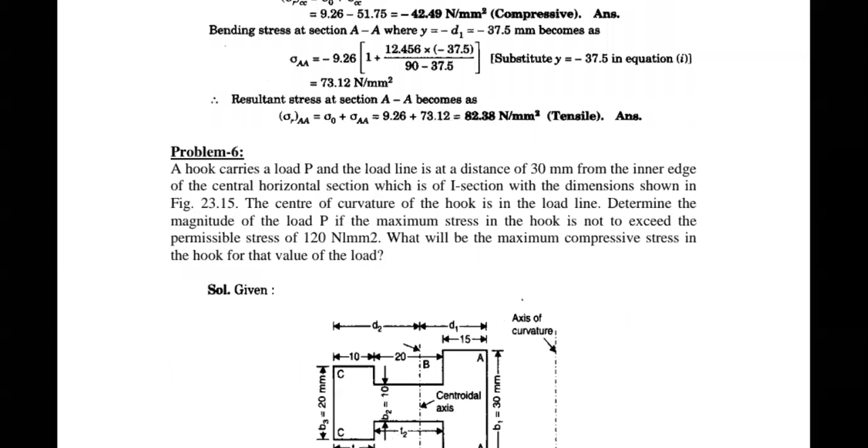In the last class, we tried to solve stand cross section problems regarding crane hook or clamp devices, whatever it is. So in this class, another important section. We'll try to solve the approach, how you're supposed to approach this particular problem.

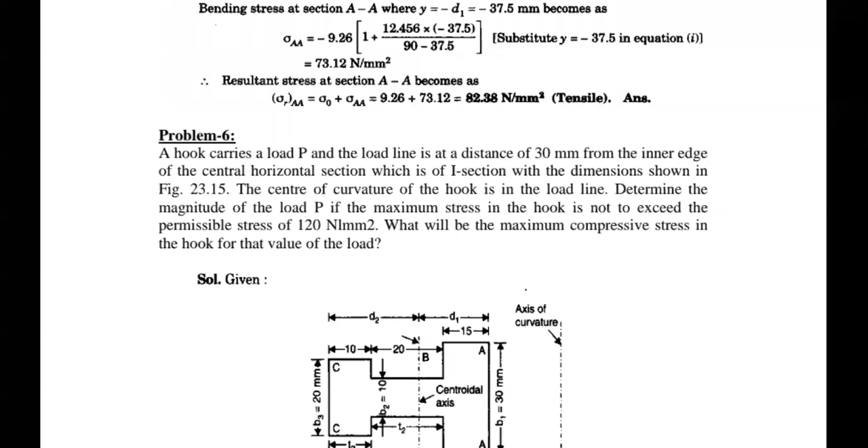It is a very easy chapter and easy problem. Try to understand the figure and solve your problem step by step. Whatever questions I ask, please respond according to that particular problem and step. Please observe the following figure first.

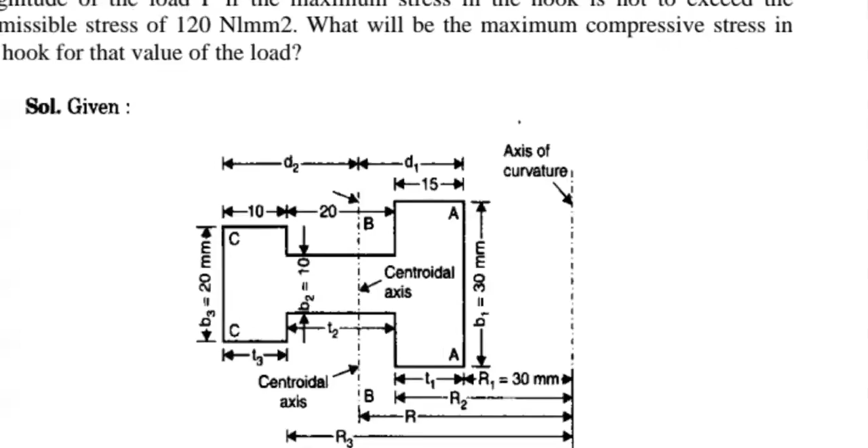I hope everyone is observing this particular figure. Please draw this figure and try to observe it. This R1, R2, R3 are normally not mentioned directly; you yourself have to allocate or identify these particular dimensions R1, R2, R3, R4. If it is mentioned in the problem, it is very useful.

Without any difficulty, you can directly apply your principles or formulas, and you will get the answer. Please observe this I-section for 1 minute and try to identify the dimensions also: axis of curvature, centroidal axis, and the distance of R1, R2, R3, and T1, T2, T3. Please observe those standard dimensions available in your figure.

Later on, we will discuss how you're supposed to solve the problem. I hope this chapter is very, very easy after completion of this particular component. So it is very easy for you.

From next class onwards, we'll move on to the next one. Please practice only this stand section, that is sufficient. The problems we'll discuss in crane hook, where the same model will be available but orientation will be different. Only orientation will change; we already discussed two crane hook problems. So practice more problems available in your strength of materials textbook.

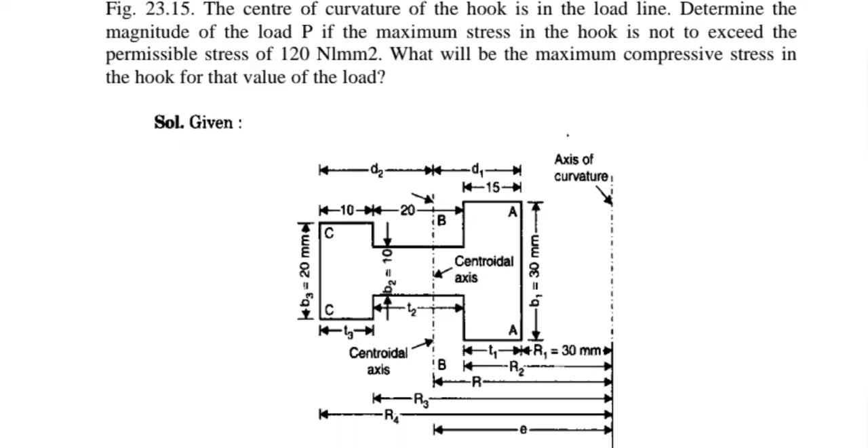Right now, please try to write down and read the problem. A hook carries a load of P, and the load line is at a distance of 30 mm from the inner edge of the central horizontal section, which is of I section.

So already mentioned that it is a cross section of I section, with the dimensions shown in figure. The center of curvature of the hook is in the load line. Determine the magnitude of the load P.

Determine the magnitude of the load P if the maximum stress in the hook is not to exceed the permissible stress of 120 Newton per mm square. What will be the maximum compressive stress in the hook for that value of the load?

So I already told you that whatever the type of problem it is, please observe that. This is the easiest method, I keep on saying that. You first observe what type of a problem it is.

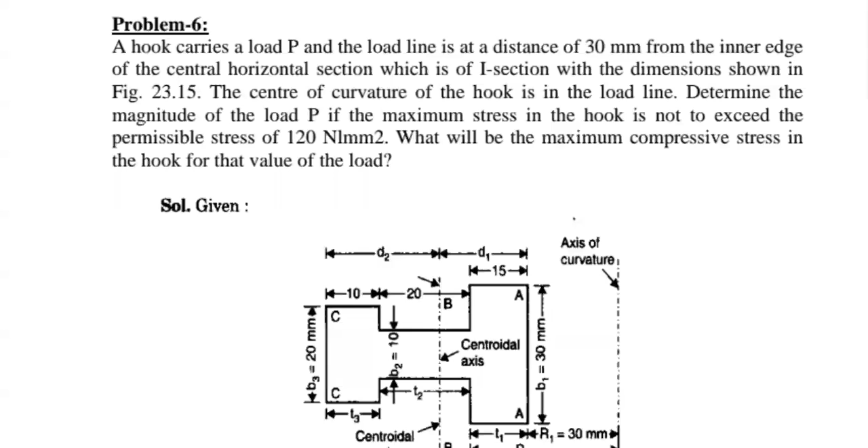In this case, please observe that for this particular problem, you are having an I section. Normally, if it is a triangle section, rectangle section, circular section, we are having standard formulas - pi by 4 d square if it is circular, area equal to b into d if it is rectangle section. But if at all it is an I section or T section, are you supposed to calculate the formula of A?

So you please go back to your calculation of centroid. In centroid, while you are calculating the area, simply you have to divide into number of blocks - it may be I section or T section. At point B and C, you're having divisions. Likewise, you have to split into 3 parts.

Same procedure - I hope you already know how do you calculate the area, total area. Total area equal to B1 into T1 plus B2 into T2 plus B3 into T3, you can say that.

So total area will calculate area values, because you're having 3 blocks, 3 rectangle blocks. So simply you have to split into 3 parts and calculate the area of each and every block and try to add. Almost summation of all the 3 areas, you will get the final area of your cross section.

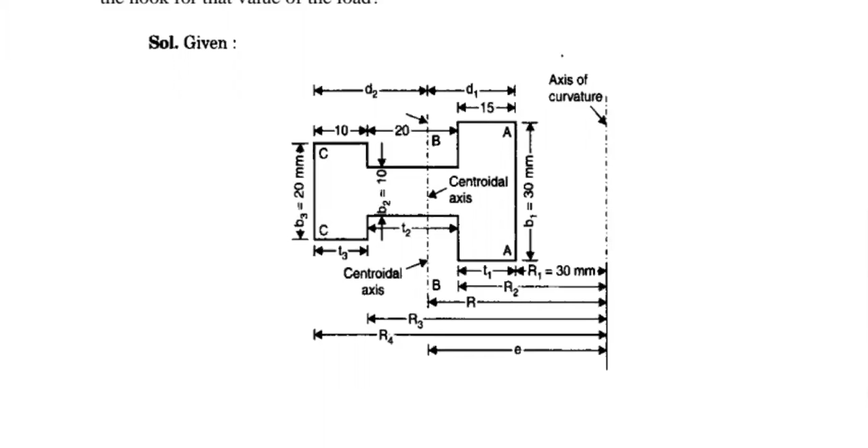Now please move on to this another slide. See, this is the calculation. So before that, please calculate. My sincere request is first calculate the area value and please verify your area value with this answer. So before we proceed further, you please calculate first the area, then H square value, then we will move on to the further steps.

So we follow our instructions so that it is very easy for you. First calculate area, total area of cross section. Here cross section is I. Calculate area and try to verify your area value with this answer. I will give 2 to 3 minutes, it is sufficient for calculating the area value. Please don't look at the answer. Without looking at the answer, please respond whether area value equal to 850 mm square is correct.

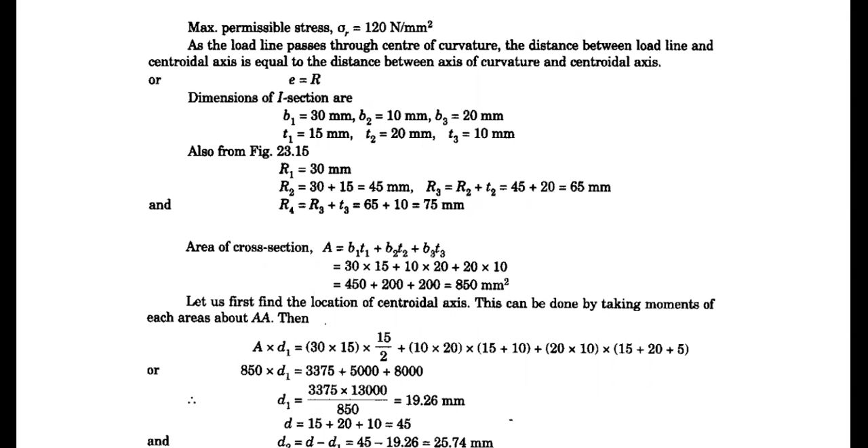You please verify whether his answer is correct or wrong, without seeing, according to that particular figure. So figure means, simply it is better to shift my slide so that it is easy for you.

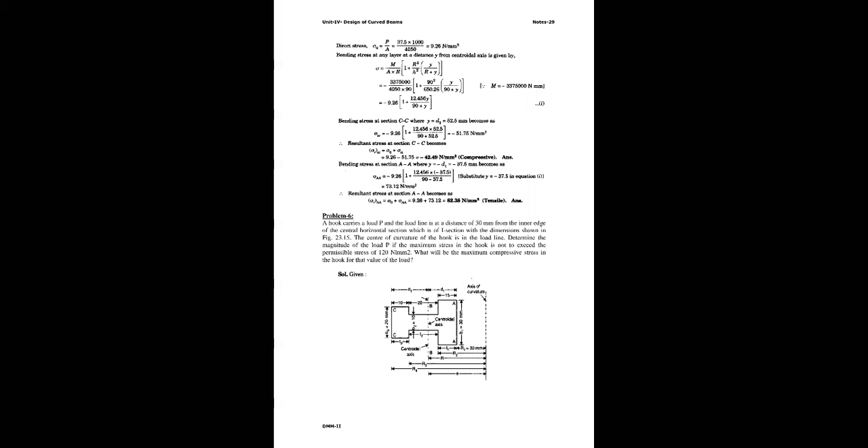Now calculate area. So it is better to shift my slide so that you calculate your area values and please check with your answer area. Because why I'm insisting on the calculation of area is this is a different cross section compared to your other sections. So if you are thorough with your I section, then it is easy for T section also, same procedure, you're having the same procedure for T section.

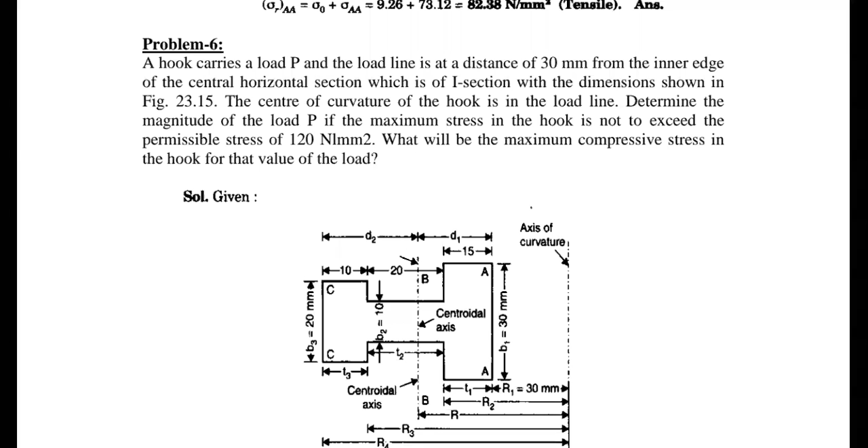So already each and every dimension is available on your figure. Observation of the figure is more important while you are solving the problem. Each and every information is available in this figure only. Once you understand this figure, it's easy for calculating the remaining steps. Once you have the area, then go for the h square value. If you have the h square value, then you can go for your maximum stress and minimum stress value. Then you'll reach the end of your problem. Just only 3 steps are required.

So my intention is, as it is a different cross section, an I section, in order to recollect the concept of centroid, I just simply ask you to calculate area. Otherwise, you simply move on to the next one. If it is a standard cross section like rectangle or triangle, no need to calculate or worry about the area because the direct formula is available. But here it is an I section. No need to go for centroid calculation, just calculate the area, that is sufficient, by division of blocks. So at AA you have one block, at BB another block, and CC another block. So divide it into 3 parts.

Calculate first part, second part area, third part area, as it is rectangle blocks. Now tell me the answer.

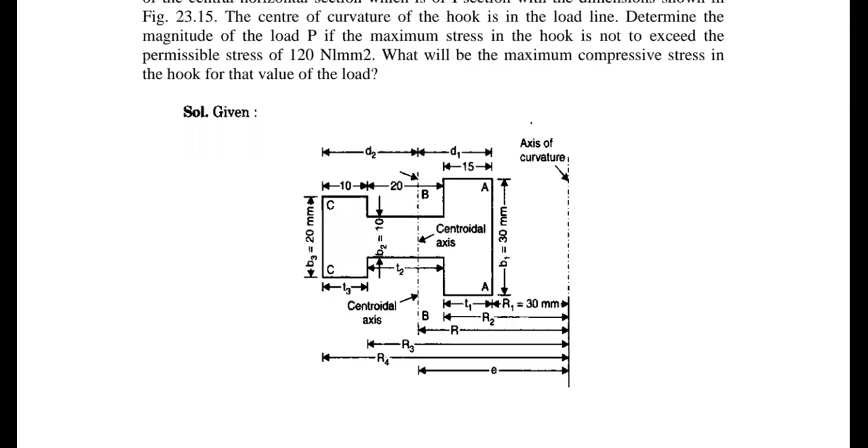Right, anyway, without wasting time, just simply calculate total area equal to B1 T1 plus B2 T2 plus B3 T3. Please observe in the given figure. Please observe in the given figure. So B1 T1 plus B2 T2 plus B3 T3.

So what is B1? B1 is equal to 30 and T1 is equal to 15, giving 450. The first one is 450. Second block means you have 10 into 20, so 10 into 20 means 200. And third block means B3 into T3, 200. So your answer is 450 plus 200 plus 200. So total is 850 mm square. So without a calculator, you can easily calculate this total area value.

So I hope you understand that for I section, and you proceed for your T section also, if it is given in your examination. T section means you have only 2 blocks, so total area means B1 T1 plus B2 T2 if it is a T section. So these are the only 2 different sections we have, right?

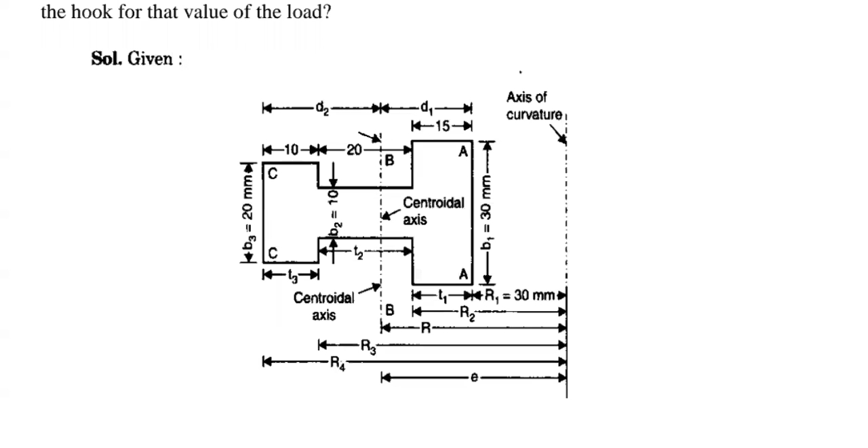So right, very good, fine. So after having your total area values, what is your next aim? Next, calculate the h square value by looking at the right. It is very difficult for you to remember for I section, I know that. Anyway, I am showing the formula for h square. Based on that h square formula, please substitute them. I hope everyone can see it. H square value equals R cube by A, B1 log e R2 by R1 plus B2 log e R3 by R2 plus B3 log e R4 by R3, minus R square.

I hope you observe the formula, and based on the formula, you please substitute. And if you have a doubt regarding what is R1, R2, R3, please write down the formula. I will immediately swipe down my slide so that you can see.

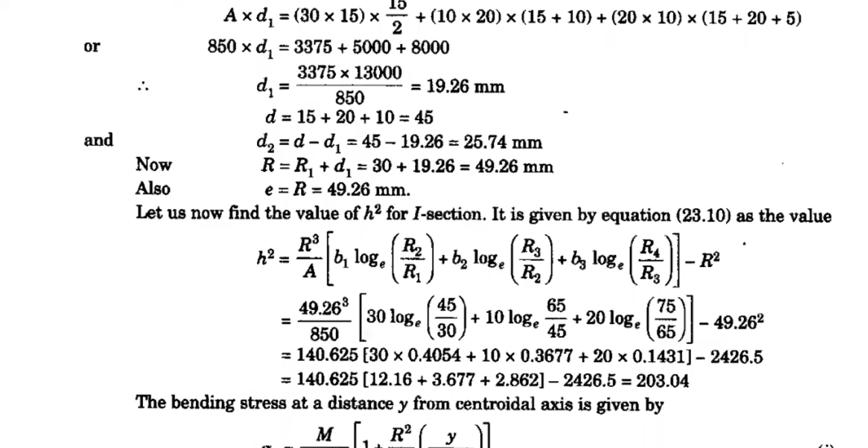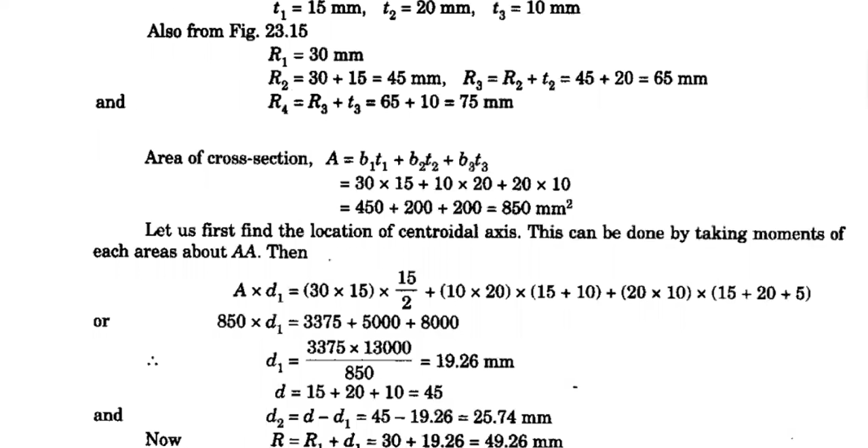So D value, total D value, means D1, D2, D3. Someone is asking how do you calculate your D value. So what is the D value here? You calculate here. What is the D value? 15 plus 20 plus 10. Please observe that. It's a simple question, and again you are asking. Already you know this in case of centroid, so you have D1, D2, D3, right? So you are having these D1 and D2 values.

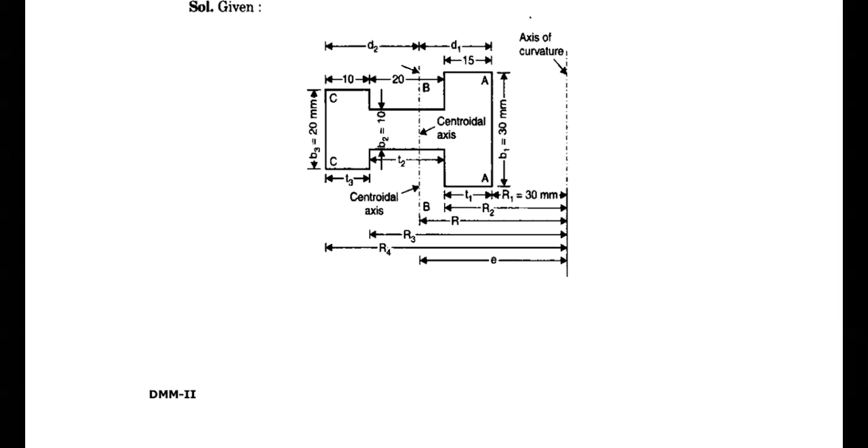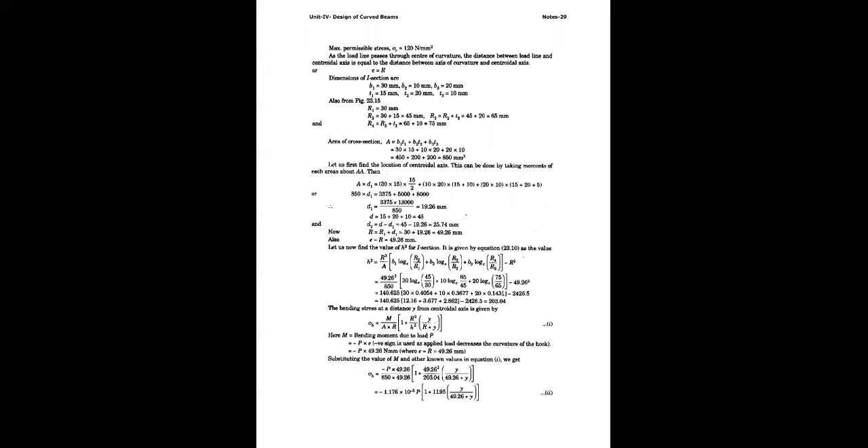In this figure they have shown only D1, D2, but D1, D2, D3 are also there. So 15, 20 and 10 values. D means you are having total depth value. Please understand that, total depth you can say.

So that is the centroid value. That is the centroid value while you are calculating the centroid procedure, you are having that procedure.

Once if you know the centroidal axis from the base, please understand the concept of centroid while you are calculating, in order to locate your centroidal axis. Location of your centroidal axis.

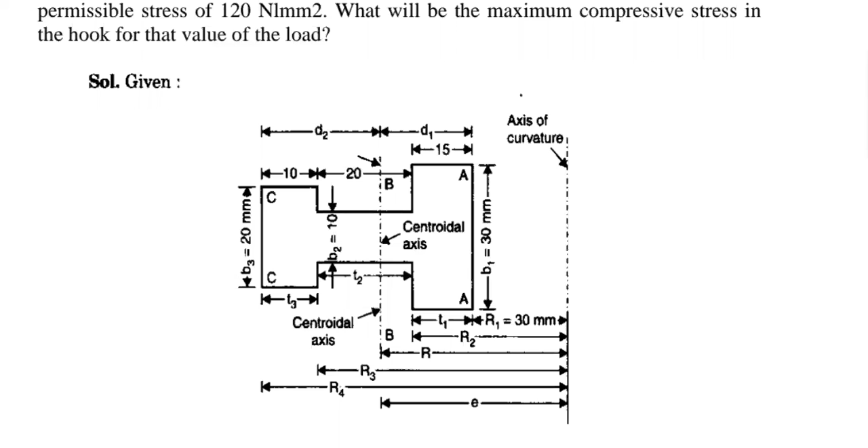So based on that, D1 and D2, from the bottom layer or from the top. Please understand the concept of centroid regarding the centroidal axis. Position of centroidal axis, how you locate it, by calculating the centroid value A1 y1 plus A2 y2 plus A3 y3 by 3.

So then you can know the position, the distance of your centroidal axis from the bottom side or from the top side, whatever it is, from the bottom side and top side also. Position of centroidal axis is position of centroidal axis.

We are locating the centroidal axis here. So at what distance you are having the centroidal axis? This means you require to calculate the centroid value.

But the centroid value is from base only, Amma. So I hope you understand this concept. I hope you are understanding what I am saying.

So if at all you are having any difficulty, please go back to your centroid problems. How do you calculate?

Anyway, so many number of persons are responding. Okay, but please understand the concept, then we will discuss the answers. No problem, first you understand the concept, then you will understand the procedure, right?

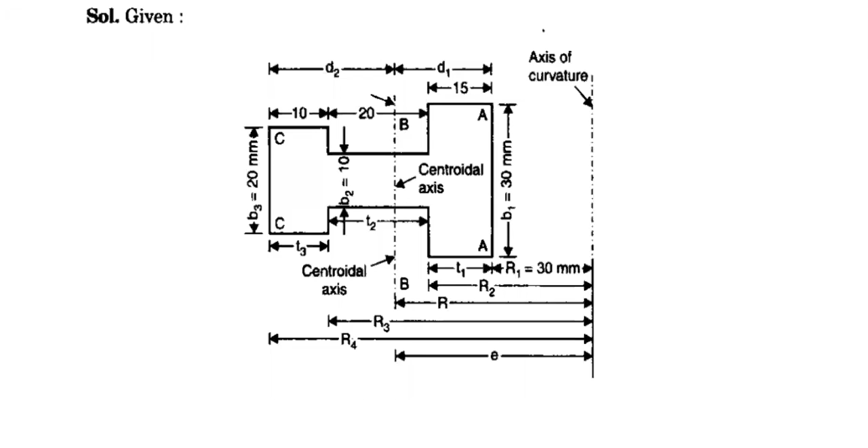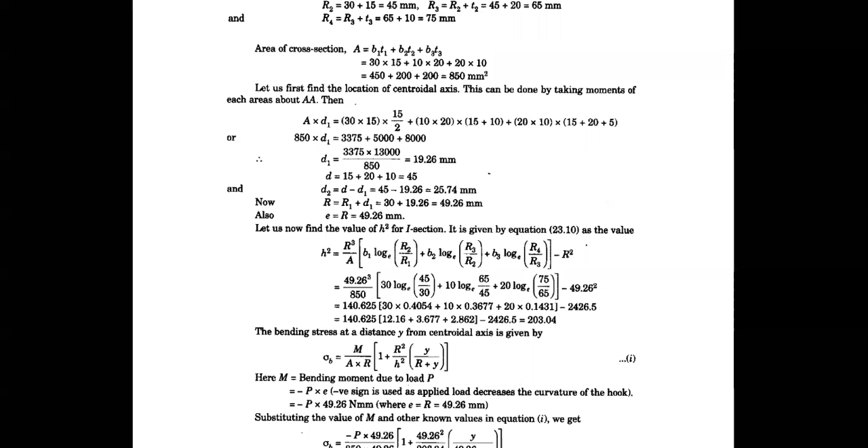So your R value 49.26, someone has responded, Amma. Some 25.74 is also somebody's response. So your answer is correct. Please verify your answers if it is wrong, please let me know. Same procedure is applied here.

So if at all you understand, then please follow the remaining steps. Once you know the value of R, then it is very easy to calculate R1, R2, R3, and all those things, and please substitute in the given relation of h square once you understand.

So if you are asking questions, it means at least some of the students are doing their problems. It is a very happy thing, and at least you are following my instructions. So asking doubts is always very interesting. Especially for a problematic point of view, a discussion is always very much required. Otherwise it is simply swiping of slides.

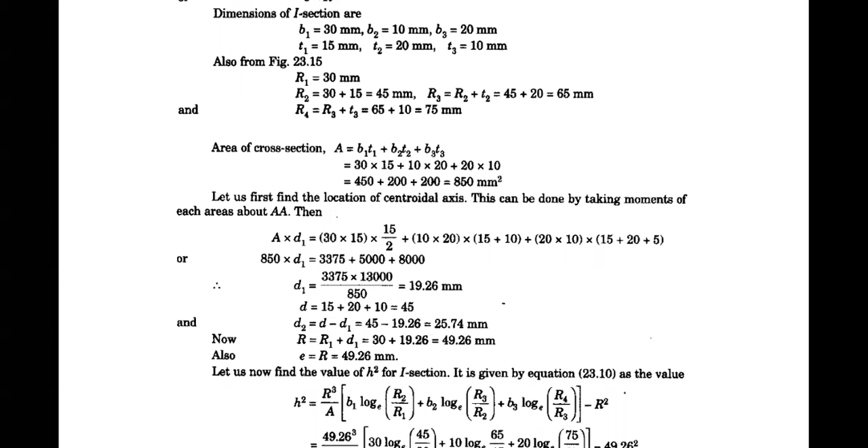So please verify your h square answer also, and again please let me know if there is any wrong answer. Please let me know if there is any wrong answer.

Please verify your h square answer also. Once you know the h square value, then we will have the values of remaining things.

Please verify your h square value. Still, if you are facing any problem regarding your centroid value, please let me know. Otherwise, please proceed for your h square value without seeing the answer.

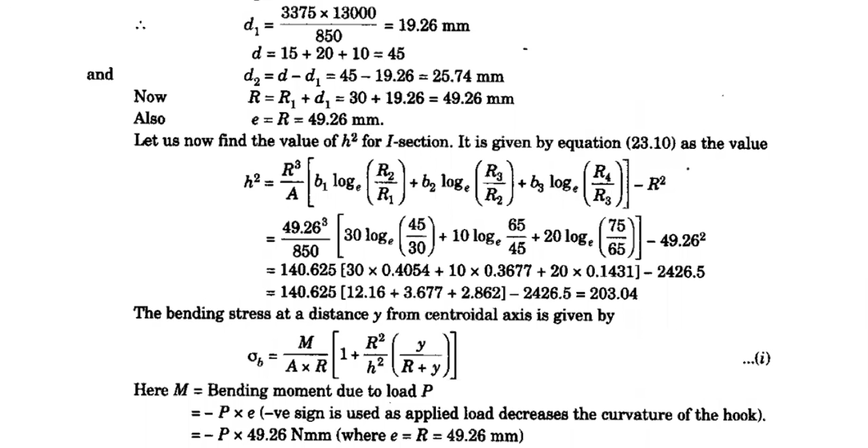So please try to find out the values and verify your answers. I'm just simply scrolling down my answers, please verify after having your sigma B. Then here, I told you that you are having y values.

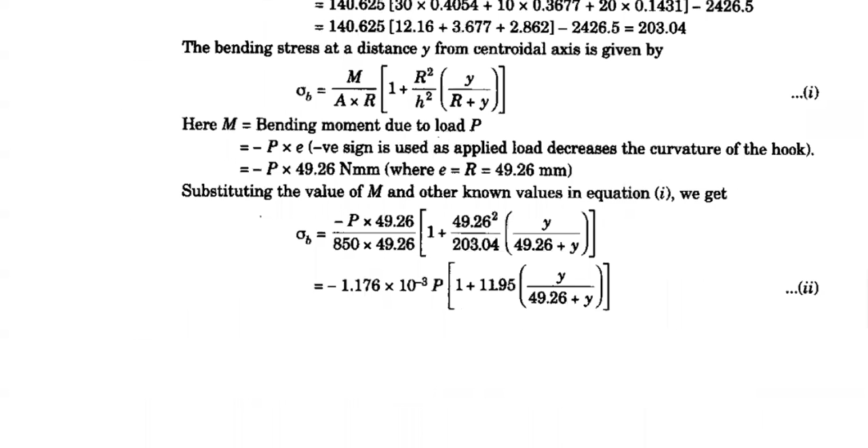There are 2 y values. Please understand the y value. The bending stress will be max at section AA, where y value is minus 19.26, and there is the next y value you are having. Please substitute both y values.

Same procedure for the circular section and for the trapezoidal section. You are having 2 values, 2 y values. Again, you have to substitute both y values, no problem.

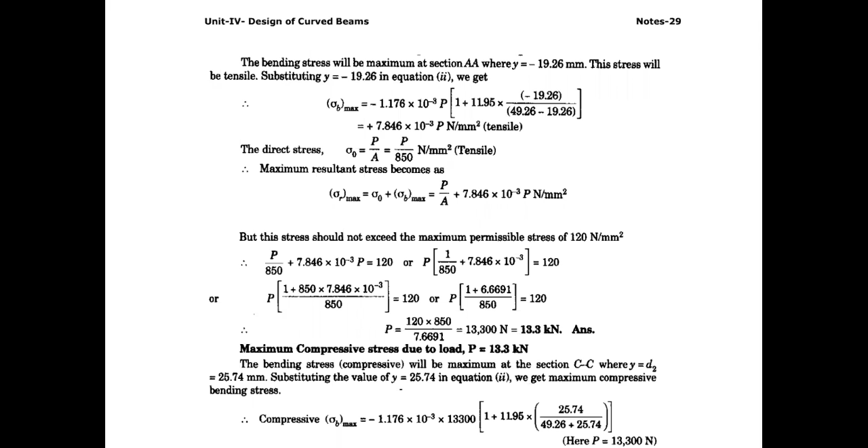So finally, after having sigma B, you are having direct stress. Please add the direct stress value, load by area, load by area. So once you complete all the steps, it is very easy for you, just substitute in the given relation.

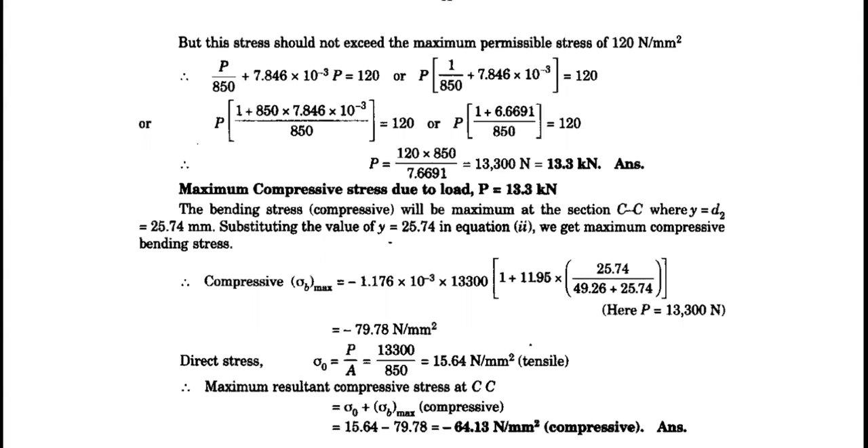That is sufficient, so please refer to my notes. Don't worry, that is available with you. Please verify your answers after completion of the problem.

So with this problem, please try to practice this kind of problem, especially what I explained here. Verify all these problems and practice all of them. If you have any doubt, every time I ask you to come up with your doubts on Saturday's class. In the next class, we start a new chapter, but on Saturday's class, please try to come up with your doubts so it is easy for you and for me to clarify them.

The occurrence of questions will only happen if you practice, then only you will have doubts. Otherwise, definitely you won't have any doubts. So please practice these particular problems. Be thorough with the problems.

And I told you that especially for the second chapter and third chapter, most of the times you don't have theory questions. So in the next class, I'll try to explain some of the theory questions in this particular course. Theory questions, expected theory questions. After covering the expected theory questions, then we move on to a new chapter.

Right? So especially theory is very, very important. Please verify your previous question papers, on the question paper at least for 4 marks they also try to ask theory questions.